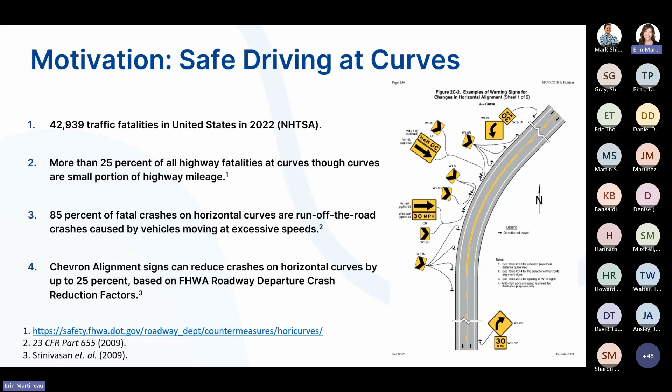So let's dive in. I know that there was just a new version of the MUTCD released at the end of 2023, and this sort of starts back in 2009, when that particular version of the MUTCD really was focused on horizontal curve safety. They established a compliance date where we said, okay, all bad signs need to go.

We need to make sure we are consolidating the signs that we're using. We're using less confusing signs. We're using uniform signs and consistency to not confuse drivers. And then they did consolidate sections relating to horizontal alignments in general as well. They set a date saying that by the end of 2019 we need to make this happen.

So here's kind of a look at some of the signs. I sort of went over this already. It was focused on consistent usage of a few signs, providing better driver communications rather than doing lots of supplemental things and going with lots of different signing options. So rather than giving a lot of options, they really gave some good guidance and requirements there. And then, like I said before, they limited the set of signs that were applicable for these places.

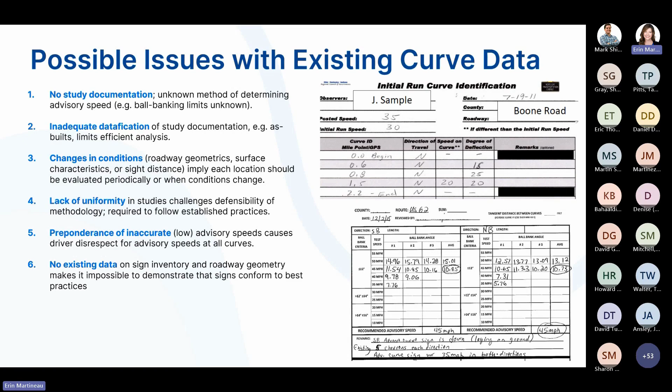And then you may be in a place where there's not really any existing data on your current sign inventory or your roadway geometry. And it makes it impossible to really show that, hey, I'm conforming with best practices here.

So a little bit about curve assessment in general. There are several methods out there that you could use to gather the curve assessment data. But regardless of the method you use, you're really looking at 6 key elements here. You're considering the roadway geometry, and that's a big word that I'll talk about in just a second, because there's a lot of things that go into that.

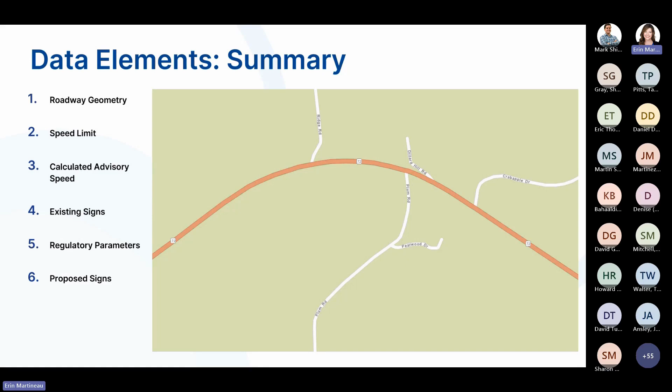You need to know the speed limit of the roadway. You're going to need to calculate the advisory speed. You need to know what signs are there in the first place, what regulatory parameters exist for the agency and the area, and then you need to know what the proposed signs are based on the roadway geometry and all that good stuff.

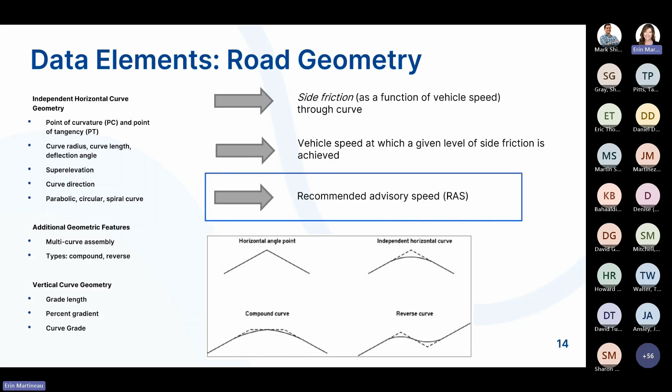If we focus in on the roadway geometry, it contains its own set of elements for describing the curve. So from these, we just use the vehicle speed and lateral friction to produce the recommended advisory speed for the curve. That's basically it. We use math. I don't know what else to say there.

So a little bit about the available methods. There are 6 recognized methods according to the FHWA. I looked this up, and I haven't found anything new they're endorsing since that 2011 paper. We have the direct method, where you go out into the field and take field measurements of traffic speeds. It's almost like a spot speed study on the curve, but you have to be standing at a certain place in the curve and make sure your technicians are doing it correctly.

There's the compass method, where you're using a digital compass and a tool for measuring the distance that you've traveled. There's the GPS method, where you're using a GPS receiver and some software to determine the road geometry. There's the design method, where you basically analyze the road geometry just from the plans you already have. You don't go out into the field at all.

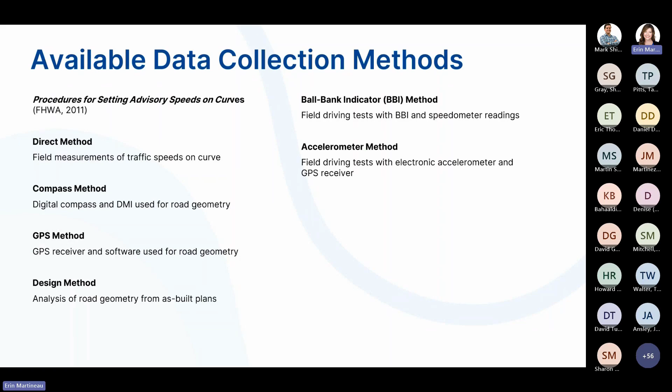There's the BBI method. We've all heard of the ball bank indicator method. You do field driving tests around the curves, get the speedometer readings and the BBI readings, and calculate the recommended advisory speed after the fact. And then there's the accelerometer method, where you do field driving tests with an electronic accelerometer and a GPS receiver.

For example, the compass method, you really only want to use on low volume roads, because you're going to be stopping and measuring a whole lot, and it's just going to take forever. Some need 2 people in the car, some need 1.

And so the big key takeaway there is that what is necessary is a data collection system with report automation and then having a good plan for data management, because there is a whole lot of it. So here's what we ended up doing. The method that QC uses is we sort of combine the GPS and the BBI methods together. And I'll talk a little bit about all of that. But what we were able to do was get rid of a lot of the disadvantages associated with just picking one method over another.

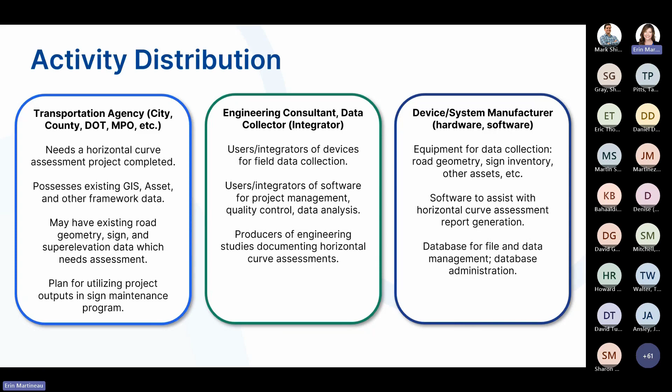And having people trained that know how to use this equipment really well is a really key factor here. So we're the people, QC, that's sort of where I live. We're the people that are using the software for the project management. We're doing the quality control on the data and making sure you get good data, because we've done it over and over and over again. We've developed some good systems for doing it. And then we actually produce the reports and the studies for you when we're done.

So we get all this good stuff, and for every single project we do, we create a turnkey project management system that is specific to that project, because everybody's got different requirements, different needs, different reasons they're doing the project, what they're interested in. So obviously our deliverables, our processes, our QA procedures are going to be tailored specifically to that need.

We use things like cloud file storage management systems. We have our own project management architecture. We use ArcGIS Pro and project maps. We use AGOL maps. And all of this is used to manage the scope and the schedule, the delivery requirements, and then we also monitor our performance throughout using all of those systems.

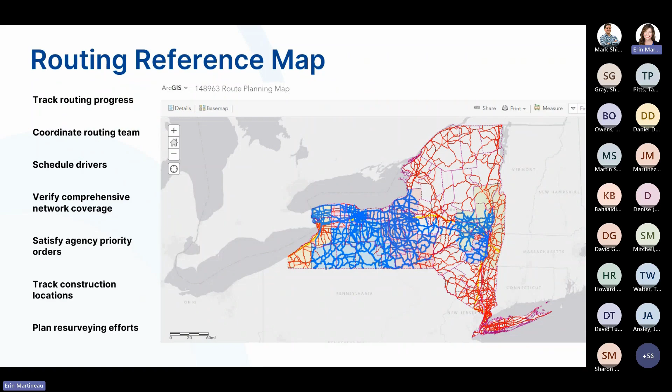So we used ArcGIS to sort of track our progress, monitor progress. But to actually design a route, we use Basecamp for that. So we convert the agency's road network shapefile into GPX routes of little mile segments.

Basecamp allows you to estimate driving times so that we're able to schedule driving shifts with safe limits on resting hours. We don't want them driving and driving without sleeping in between, and that wouldn't be safe. So the routes are saved into cloud storage, and then they are distributed to the field technicians for download when they go drive a route.

So when a driver finishes a route, they log the route. That's part of the reason they use the tablet. They note any device anomalies, any construction, road obstructions, other miscellaneous notes, anything odd that happened in the field. My camera overheated, whatever. And so all of that log data is then transferred back to the GIS database that I mentioned before, and we're able to plan

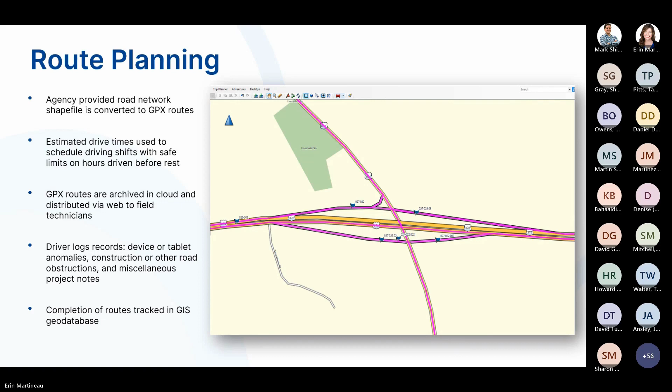routing. And so this is a nice picture of that same area I was talking about that had been routed. So this has been routed, and it shows us how big each is. And these are separate routes, and we labeled them based on preference. I believe the client wanted certain areas done first. So here we go. Okay, so that's a little bit about how routing works.

Let's get into how we actually collect the curve data. So the Curve Advisory Reporting Service, or CARS for short, was developed by Rieker Inc. Rieker's a pretty big company. They've been around for a long time. They do lots of ball bank indicator stuff. They've been in the game for several years. But this specific device was developed specifically for this purpose.

So their system is comprised of three main components. They have an integrated inclinometer and GPS that is mounted to the dashboard of the vehicle. It collects and records data continuously throughout your trip. It records time-stamped raw GPS and BBI data in real time as you're going.

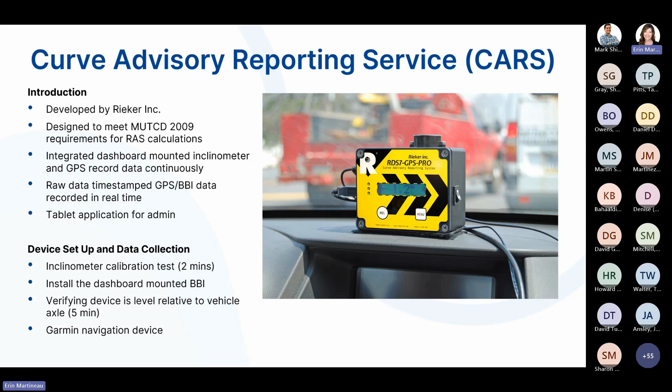And something we don't have pictured is the SD card management. Usually if you're using a GoPro or any kind of dash cam, you're dealing with managing lots and lots of SD cards. They're usually micro SD cards, and it's kind of hard to get an inventory on those bad boys. So we had to come up with a whole system for managing that as well. So that's kind of like a fourth database that we used to manage our stuff.

So I promised I'd talk about the CARS portal. So here it is. After the driver drives his route, he logs his route, and then he uploads his data to this cloud portal. And what this wonderful cloud portal allows us to do is it uses a Google Maps API to visualize the data. And those are all the data points that it pulled here.

We use a polygon tool to identify the point of curvature and the point of tangency for each curve. So I will say our folks go through quite a bit of training to do this accurately. So that's fun. But I highly recommend getting good training when you go to do this kind of stuff.

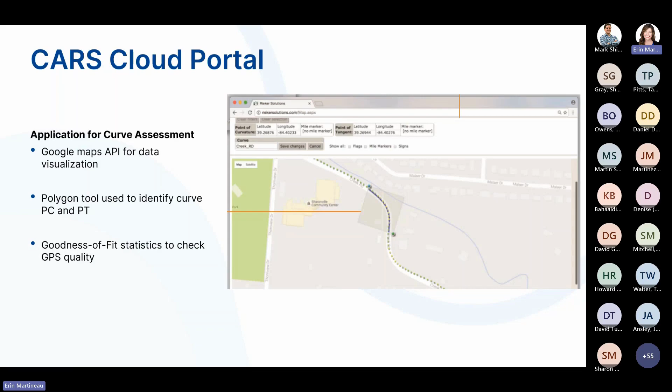And then it provides goodness of fit statistics to check the GPS quality, to show if the route that was run was a successful run or not. There's lots of different types of curves, all that good stuff. Here's a loop ramp data example where we have modeled data in blue. That's sort of what the computer thinks the curve looks like, and it did a pretty good job here.

The mile marker data, so everything's in different layers, right? The mile marker data is in red. It shows us where we are. So the mile marker data helps us talk about where the curves start and stop. This kind of gives us a language and a frame of reference for talking about them. And then the GPS-BBI data is the green stuff. And then it kind of turns blue once we model the curve.

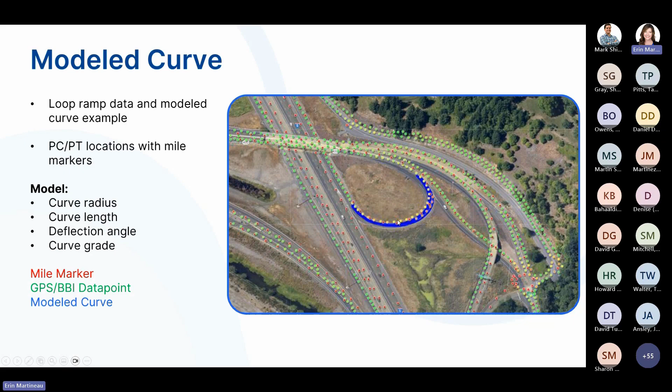The model produces information about the curve radius, the curve length, the deflection angle, the curve grade, all that good stuff. Each curve, so once we process the curve, each processed curve gets a safe curve speed analysis report. Now, typically QC will do, this looks like we did 8 runs. Usually we do 3 or so runs in each direction, just to make sure we're getting really good GPS fit.

So each curve gets this nice report. It tells you the lateral friction limit degree that was used to calculate the recommended advisory speed, and all that comes from the MUTCD guidelines. Gives you a grade for the curve, deflection angle, all of that is just done automatically.

And you don't have to use an Excel file you downloaded from FHWA and bang your head against the wall, like I did just recently, because it wasn't working. I couldn't get the macros to work. But GPS fit is in here as well. So what will happen is CARS will choose the pass with the best GPS fit. And that's how our recommended advisory speeds are determined here.

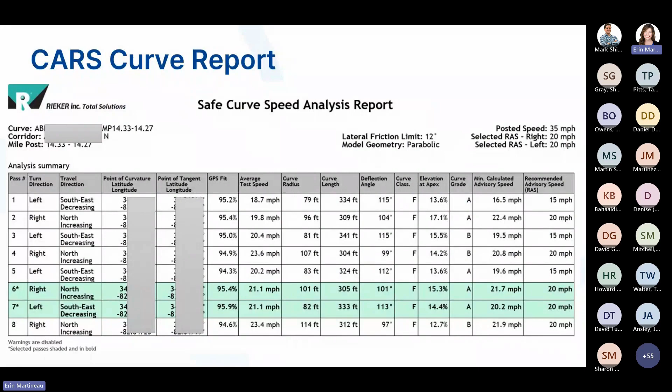So now that was one curve, right? That would be a whole lot for your entire system. So it also produces a nice summary report. We like to call it the HCAR for short. The summary report just gives you the base data for the curve, what direction, travel, lat long, the recommended advisory speeds, just very, very high level data.

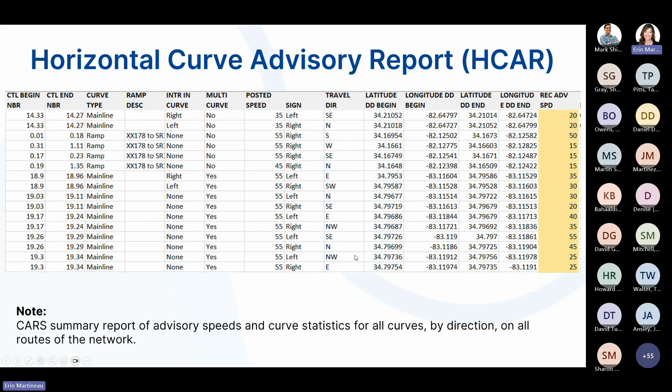And then, it's not in the picture, again, the GoPro and the SD card, but if an agency does not have a sign inventory or would like an updated sign inventory, it's really easy to collect while we're doing the curve analysis. This is a nice add-on project because it's not really hard to do, because we just stick a camera up there and we take the GPS from the camera, and the video from the camera, and all of that goes into SignProx.

And so SignProx is a great program developed by Eric Green at, is it University of Kentucky? I think it is the University of Kentucky. Eric built this to work with GoPro video. And it's sort of a database and sign logger program that will allow you to collect signs along the roadway and then map them onto a database.

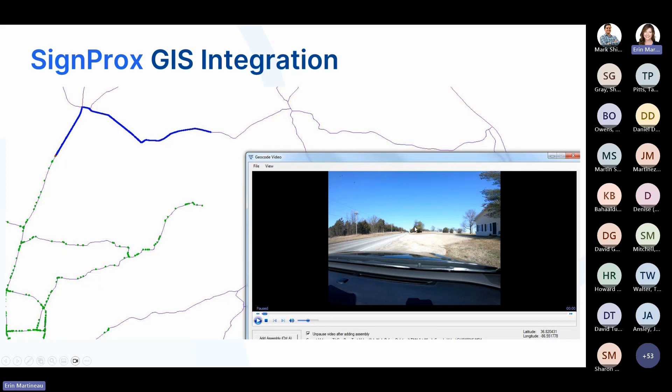So the little red point, if I had a video here, I'd show you as you're driving along, the little red point moves, and you can tell that this is his route. And as we collect signs, or as we see signs come up in the picture, we can say, hey, I need to add a sign assembly. There's something there. And so you add information about the sign assembly.

There's a lot here you can add. You can add different types here. Whether the assembly is damaged or not, any comments, it automatically takes a picture wherever you pause the video.

You've got great GPS data. My favorite feature here is going straight to Street View. It's just gorgeous. You can just drop right down into Street View and say, well, what happened? If you've got something kind of squirrely going on, this is my favorite button.

If Eric is on this call, thank you, Eric.

And then after you add the sign assembly data, you then go add information about the sign, because a sign assembly can have lots of signs on it. We receive sign information about what signs the agency has, their current inventory, all that good stuff. Or we can have the basics, the basic MUTCD signs here, and we add information about the sign, which direction are we going in, because we've got to make a pass in both directions.

And then whether the sign is damaged, if there's any special sign text or any notes on it, we add that. And that produces a nice map for us. And eventually we have a sign assembly report here with route information. So this is how it gets connected back to the mile marker data and the segment data for the client. And then we have a sign detail report. Each sign is connected back to an assembly in this case.

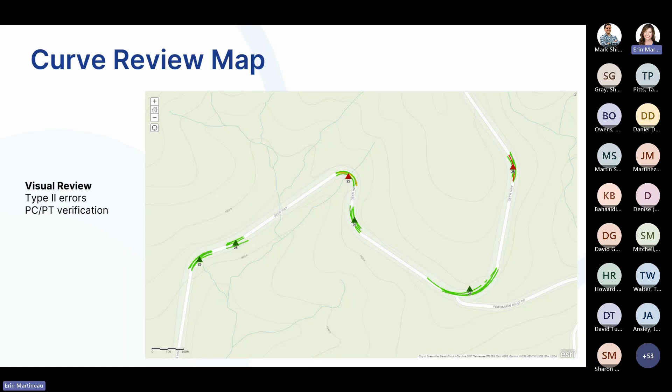We also have an automated data flagging system that we programmed flags into, just to automatically find anomalies that could point to different sorts of issues within any of our processes or our calculations. Maybe it's data accuracy, maybe it's network completion, requirements specific to the agency. Maybe it's an error in field collection.

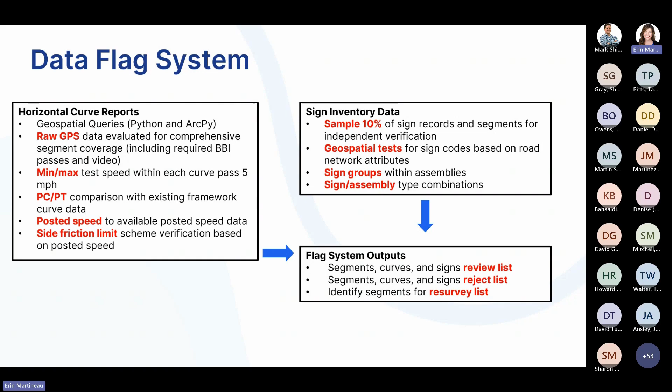So we do have a list of things we do once we generate both the curve reports and the sign inventory data. That outputs a list of segments and curves and signs that get reviewed. And then we either reject them and resurvey, or we accept them. So as you can imagine, this is just a lot of data.

Here's just some stats. BBI readings, we get BBI readings with the system every 0.05 seconds. GPS readings every 0.3 seconds. And so in one day of driving, we've got over 500,000 data points. So we really don't want to do curve assessment calculations and figure out the recommended advisory speed by hand for each curve. You really want to find a nice way to automate this.

Also, having a geodatabase with data session, which is basically a data file: what pass it is, what curve it is, other sign identifiers. What this means is name your files appropriately. It will help.

This is a cloud database, and with any cloud database system, you end up playing a game of how big can my files be and this thing still function optimally. So you end up playing an optimization game, because the amount of data can become overwhelming. Something we found through this is to associate our data sessions with road segments to facilitate tracking and evaluation. So like I said, name your files appropriately. And 1 hour data sessions provide satisfactory computational efficiency without making data session management difficult.

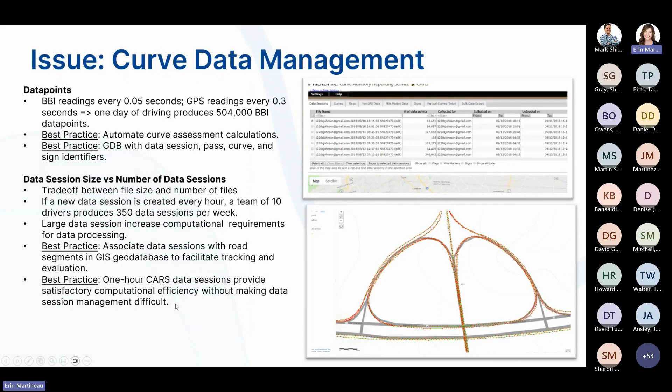So 1 hour was the sweet spot for us. So the major takeaway here,

How am I doing on time, Mark? 2:45. All right.

Major takeaway here that I wanted to highlight was the way to make this cost effective, if you are an agency, if you're really wanting to look into this, is do a lot of curves at one time as much as possible. Do a big area. That's sort of the main thing here, because with any project, there's an associated implementation cost. There's a spin up cost. You're kind of reinventing the wheel for every little bitty thing, even though you might be the best systemized agency in the country, but there's still that waste that happens.

So my recommendation is do a big study, because that upfront cost becomes such a small percentage of it when you spread it across a big roadway network. Another really big thing that we learned was that providing mile marker data from the very beginning, from the agency to CARS, was an absolute game changer, because we ended up having this naming. I know I've mentioned that a few times, but be strategic about your file naming, long story short.

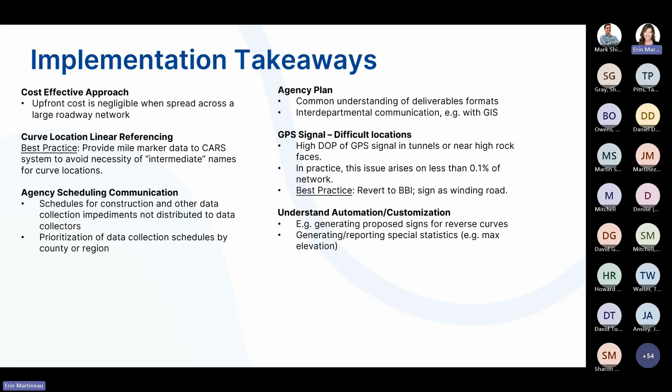Generating proposed signs for reversed curves, generating report special statistics like max elevation. I think really, this again goes back to that communication piece. What's the protocol for doing X, Y, Z? What does the agency prefer? What happens if this happens? So just really getting into those special questions there. And that's it.

Thank you, Erin. I will take questions through the chat. We do have one currently. Which ASP do you use from the curve report from the 3 runs? Is it the one highlighted in green? Yes. That was the best fit. We used the best fit curve or run.

Are agencies making your results available to the public? I don't know. Yeah, that I'm not sure about. I think that's maybe a question for Jay, might know that, or if there are any agencies on here that have done this. Any other questions from anybody? You can put them in the Q&A or drop them in the chat. Jay said it depends on the agency. Okay.